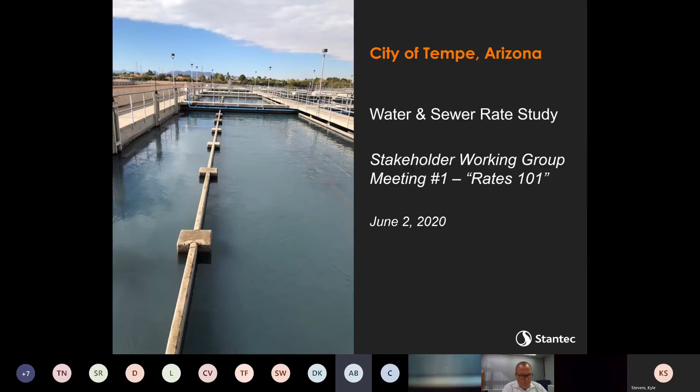All right, well, hearing no questions, this is Andy Burnham with Stantec. What myself, Kyle, and Deb were hoping to do today was to run through a slide deck presentation that we put together that's kind of an orientation to water and sewer utility rate making, some industry perspective, the general process, as well as some information about the city's rates and customer information. But I think first and foremost, we wanted to make sure that we started this process with a very good understanding of what Terry was saying about participation and education, and that really starts in large part today.

So, as I mentioned, we'll be going through today and introducing some industry challenges, discussion around infrastructure as it relates to water resources, talking about how services are provided, and try to avoid using acronyms as much as we can, but when they do come up, try to make sure that we provide a proper description of what those terms are.

And we're hoping to get as much as we can through either chat or verbal questions, get some input from each one of you as we embark upon the process, and that really starts today, whether there's key questions that you have that you'd like to have answered, provide input on certain priorities for capital spending or levels of service, or concerns about rate structures. Those are the types of things that we really want to elicit from this process as well. So we hope that we're starting a good two-way communication today, and we look to both distribute information, but really receive and hear your concerns and input to be able to factor it into the process.

So if you go to the next slide, really for today, I was just going to give a quick overview about Stantec and the water industry and the rate study process, and then turn it over to Kyle to go through each of the fundamental steps of the rate setting process, as he'll be the project manager for this year's rate study for Tempe, and to give some examples along the way to really help illustrate what we're talking about, and then close the loop again about what our next schedule and opportunities are for continued conversations with this group as we continue to move throughout the process.

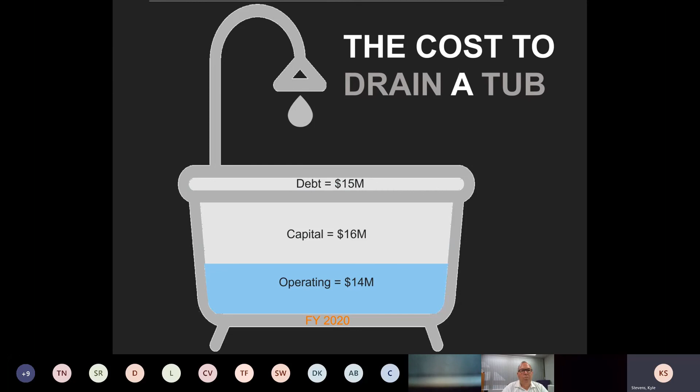We take the wastewater system, kind of the cost to drain a tub, if you will. We've got debt of $15 million, capital investments of $16 million we're making, and operating expenses of $14 million on an annual basis. So what do we do with this information? And this is something we'll be bringing back in some of our meetings that will be coming.

This is a screenshot of our financial models, and what we do here is we take all of those great data points that I just talked through, typically from the city, work with the city to incorporate them into a 10-year projection, a cash flow model, if you will, so that we can understand the dynamics present not only in the current budget year, but also moving forward into the future. And that way we can anticipate things that are coming, and ultimately, the goal is to ensure that the amount of revenue we're bringing in provides for the sustainable operations of the system.

And so I'll just orient you to a few of the key graphics. This is a screenshot from our last full rate study in 17. When we get together at our next meeting, we're going to have the updated model and projections for the revenue needs of the system. So this is the water fund, and a couple of the things we're always watching. Over here's the operating fund, and this is very much like your own bank account. This is the amount of money we have in the bank.

And over here is the amount of money we're spending in orange versus black, how much money is coming in the door. You can see in this case we've got a little bit of a gap between those two, meaning we spend a little bit more in some years than we bring in. And just as you would imagine with your own bank account, that would pull down the fund balances. In addition, you can see up here in this top line, what we had projected back in 2017 is that the water utility would need about 4.25% rate increases. So we had identified at that point in time that you would need some level of rate increases to continue to provide for the system.

So again, we'll want to compare, and we'll have a contrasting view when we pull this up next time from the 17 forecast to the most current models, which include all of the updated assumptions and cost requirements. One of the things to notice on here, and we'll talk about this in detail as we get into the next one, on this bottom chart is our CIP. And I mentioned a second ago that that's one of the more dynamic features of utilities.

When they're providing operations, we have to ensure that we're bringing into the fold the continued renewal and investment spending in the system, so the pipes aren't breaking and so that we have a system that's sustainable. But in addition, there's a number of needs that come to the system, and the needs can vary year by year. If I take this graphic over on the left, you can see how the needs and the CIP spending can vary a little bit. And we had expected when we updated this, they would actually increase in the out years of this projection. So this will continue to drive our understanding and our projections in the future as one of the larger and more variable components of forecasting utility rates.

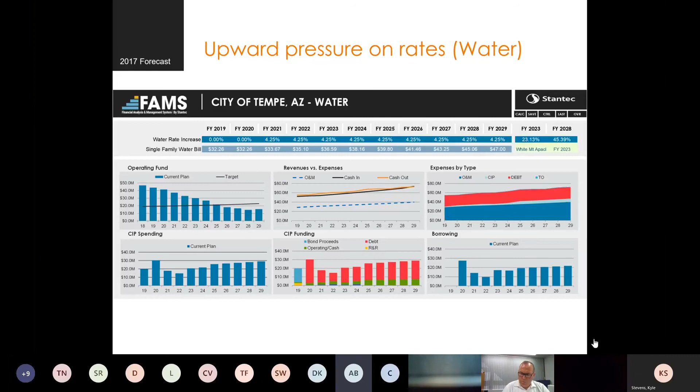So from a financial standpoint, I can certainly answer that question. I would say from a financial standpoint, the condition of the water and sewer systems is actually quite positive. The reserves are adequate. They've got some good flexibility that allows us to continue to make sure our income streams are in close alignment with our expenditure profiles over time. Particularly on the sewer side, it seems like we're in a very good position there as well.

So as compared to other utility systems across the country, where you have this type of a stable outlook for sewer and a pretty moderate outlook for the water system, I would say from a financial condition standpoint, it's very positive. But perhaps Terry or Tara could, from a physical standpoint, describe their perspective of the physical condition of the system.

Yeah, this is Terry. Bob, thanks for that question. From a physical condition of the infrastructure, like was described previously with most other water utilities, we have an aging infrastructure, as you probably know, and we've got all the challenges associated with the timing of infrastructure replacement, but also investment in new infrastructure. I would say, generally speaking, our system is in good condition. We are very proactive in terms of assessing conditions from an engineering standpoint, planning for replacement, planning for repairs and preventative maintenance and that sort of thing.

But the challenge is, as we move forward in Tempe, there's many other aspects to being able to accomplish certain types of infrastructure replacement work that we have to face, and it ends up having an effect on timing, as you can imagine, with development and not impacting customers negatively, but still being able to achieve the goals relative to our capital improvement and capital replacement program. So generally speaking, we're in good condition. Our facilities are in good condition. Our buried infrastructure is in good condition, but we have to be cognizant of the replacement needs and our maintenance programs moving forward. So I hope that answers your question.

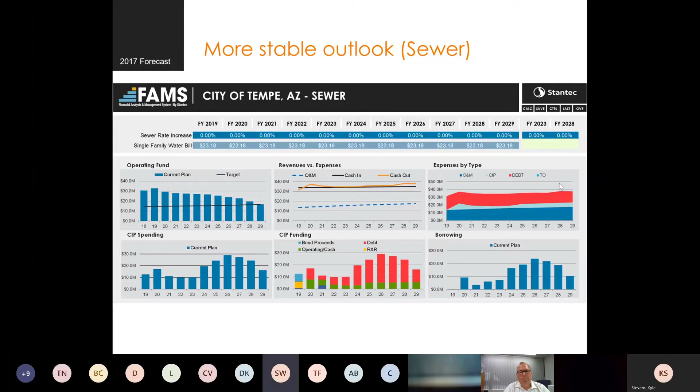Thank you, Andy. I don't see any further chat questions. Perfect. Then we'll move on to the next section, and we'll go through cost of service. And cost of service is fundamentally concerned with trying to understand that identified revenue requirement we just talked about in the last section, how to split that up between customer classes and create this rational nexus between the cost of the system and the people who are using it, and we want to try to best align those.

And when we get to the real cost of service analysis we're going to provide as part of this rate study, we're going to be taking a really deep dive into customer data and trying to understand the different ways that different customers utilize your system. I thought maybe what would be interesting to this group today is I've already processed some of this data, and one of the things that we've been working through is trying to understand the current reality on the ground that we're in with specificity with COVID and how that impacts the water utility.

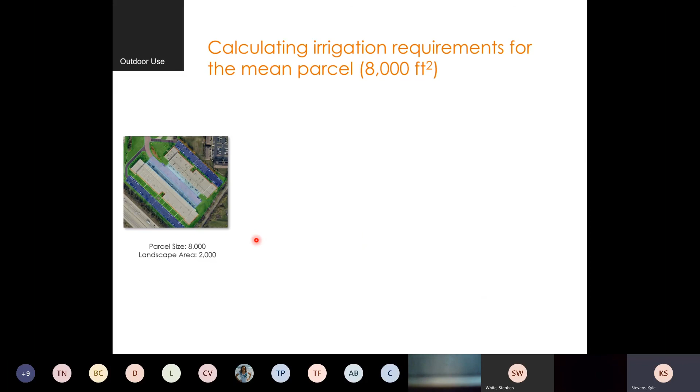We go through a process of essentially taking the parcel size, in this case 8,000, right near that average, look at the landscape area that's on there using GIS, so we can strip out driveways, hard surface pavers, pools, anything that would not be irrigated, understand what might be irrigated, and then take into account essentially what's provided by the natural environment as far as precipitation, what the requirement of the crops are in the service area, and then what the municipal system would need to make up in order for those crops to be sustained.

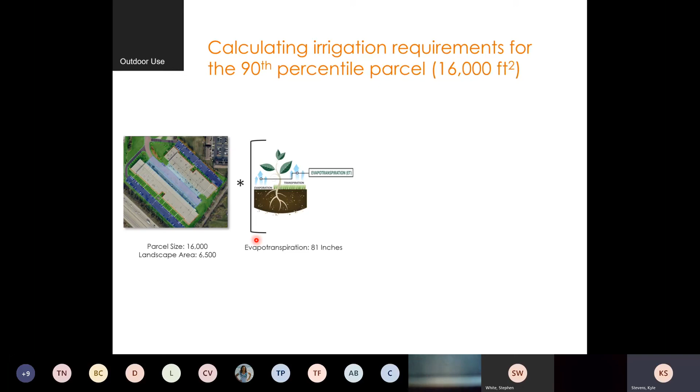And that comes up with an allotment for the next tier of about 8,000 gallons for the average lot in Tempe. As a result of the last study, though, we added a tier recognizing the fact that there are a lot of larger lots that have higher irrigation requirements. And so we went through the exact same analysis, but this time upgraded the lot size to that 90th percentile of 16,000 square feet to come up with an additional tier that runs all the way up to 20,000 gallons. And the fifth tier would be all usage up above that.

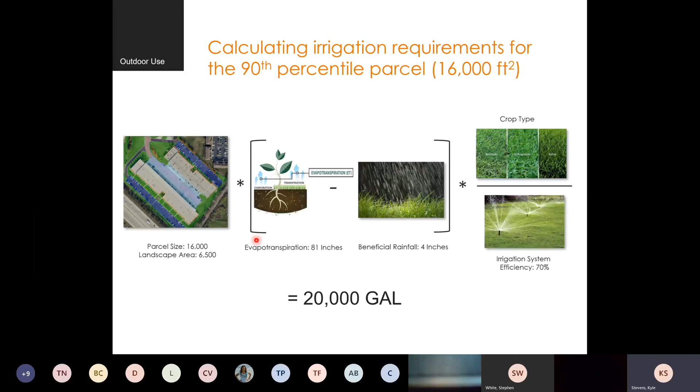So with that, I'll conclude these remarks and be more than happy to take any questions or discussion. Kyle, I see one question from Carmen, but I think I can answer this. So what do you mean with landscaping class? Are these public green areas, landscaping business, or what is it?

So the answer is it's a dedicated meter strictly for outdoor use, and that could be from a business, it could be from a multifamily complex, all their outdoor use may be on 1 meter. All of our parks throughout the city have landscaping meters. The difference between a landscaping meter and all the other meters is there's no return flow, there's no connection to the sewer system, and it's strictly for outdoors.

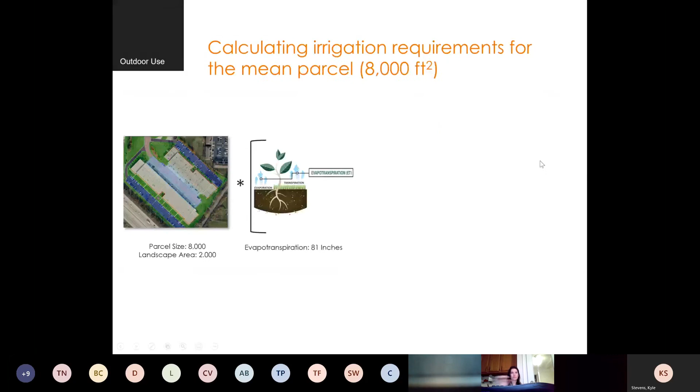Steve, did you have other questions that you wanted Kyle or I to address before we moved into the customer impact section? Oh, yeah, sorry. I was actually just asking one and didn't realize I was on mute.

So I think we kind of talked about this, but Cass has asked the question: I'm curious as to why there can't be a tier for single family homes that have acreage. I use very little water in my home compared to my landscaping needs. And I think that gets back to the fact that the break point between tier 4 and tier 5 is 16,000 square feet. But I'm not sure how much that would impact the cost per tier so much. I mean, even if we added more tier breaks or more tiers, how much that would change as far as what that cost would be. Maybe you could talk about that a bit.

Yeah, I think that tier breaks would just affect the distribution of the cost. So to the extent that we were to incorporate an additional tier, Steve, I think then the issue would be when we run the numbers with the AMI data, the usage in each tier, as we regroup it, how much is that contributing to our maximum day and peak hour demands? And so the way we size the tiers could affect the allocation of cost depending upon the usage in those tiers and how it impacts the system on the maximum day and peak hour. So tier sizing could have an impact on the rates per tier as well.